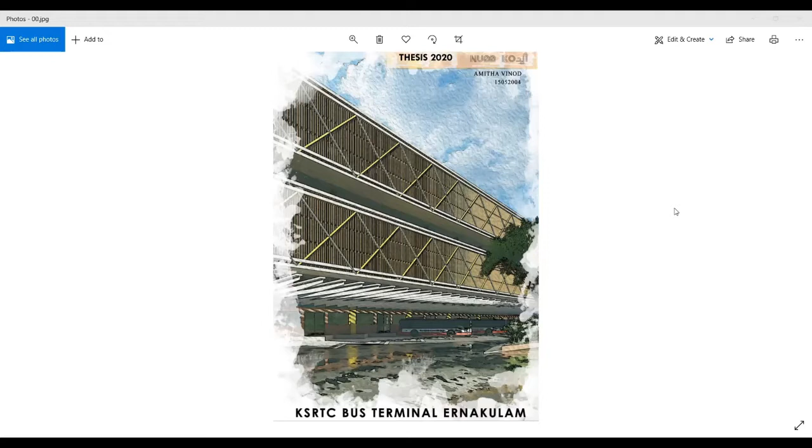Hi, sir. My name is Amita Vinod, and my thesis project is KSRTC Bus Terminal Ernakulam, which is situated in Kochi, Ernakulam.

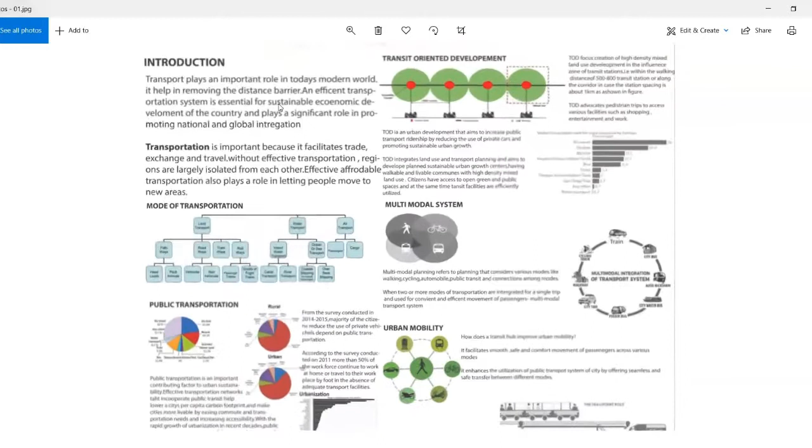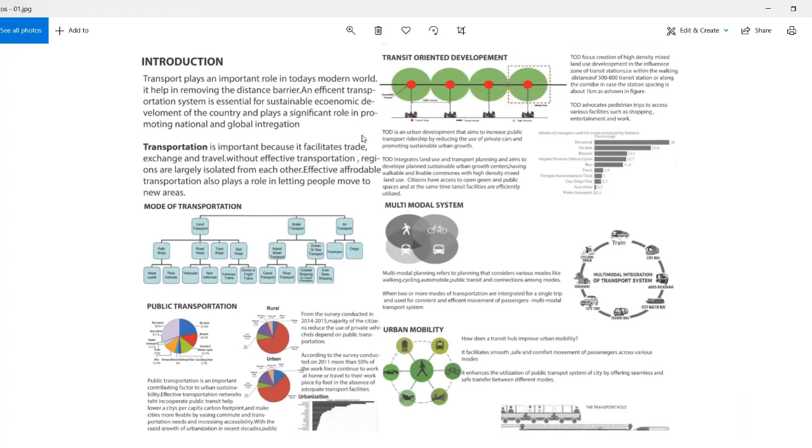Transport plays an important role in today's modern world. It helps in removing the distance barrier. An efficient transportation system is essential for the sustainable economic development of the country and plays a significant role in promoting national and global integration.

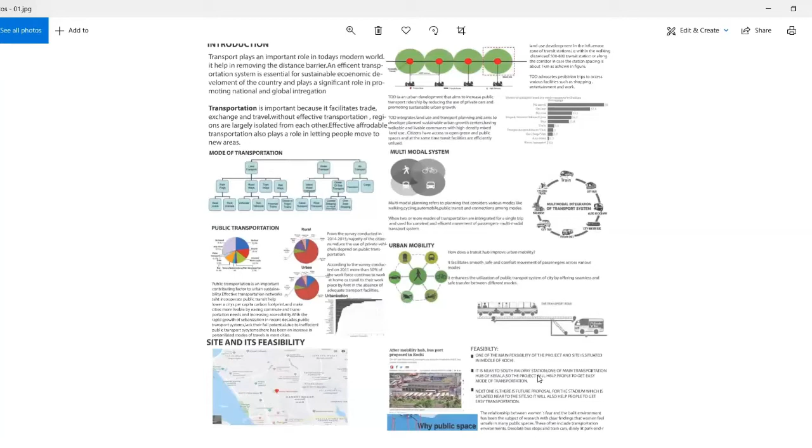When coming to the project feasibility topic, why I chose this topic is because we all know that KSRTC Ernakulam is one of the main transportation hubs in Kerala, and when compared to other populations, Kochi has a very huge growth in the population graph. Compared to the population, the area and service provided by the KSRTC is very less.

Feasibility of the project is one of the main aspects of this project, and the site is situated in the middle of Kochi, which is one of the main cities in Kerala. It is near to the South Railway Station, one of the main transportation hubs of Kerala. So the project will help people get easy mode of transportation. Next, there is a future proposal for a stadium situated near the site, so it will help people get easy transportation.

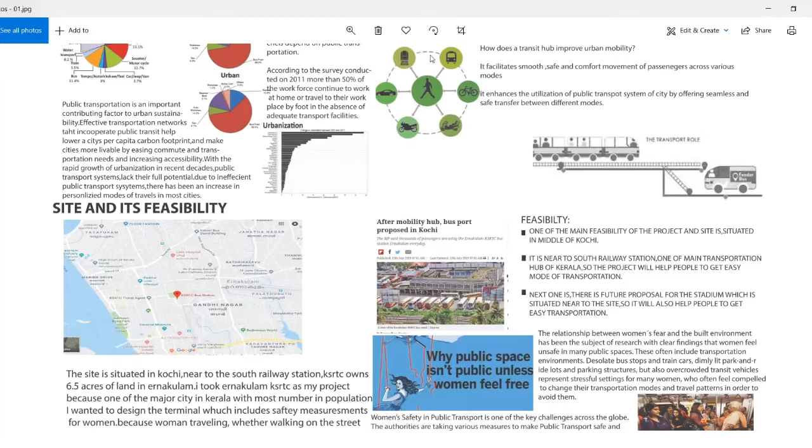And this project is handled by Kerala transportation.

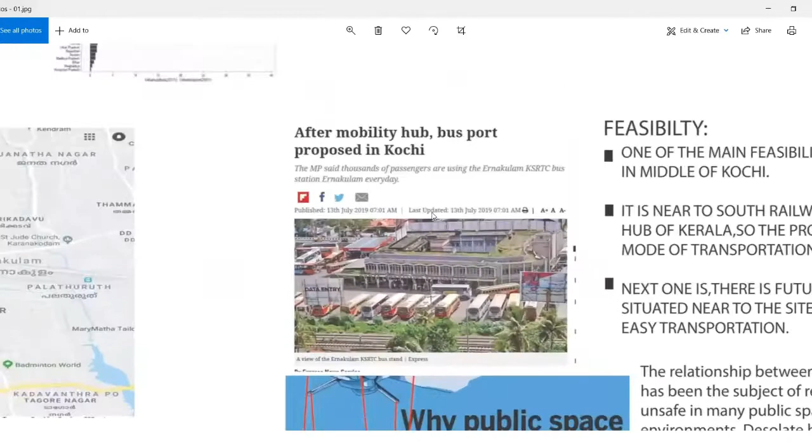This is a cut out. Okay.

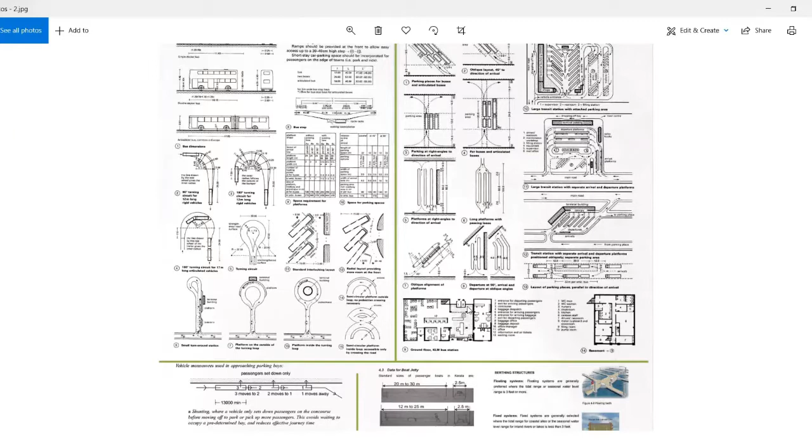When coming to the data collection, this sheet includes the width of the road, area measurements of the bus bays, other utility turning radius, service areas, and other utilities.

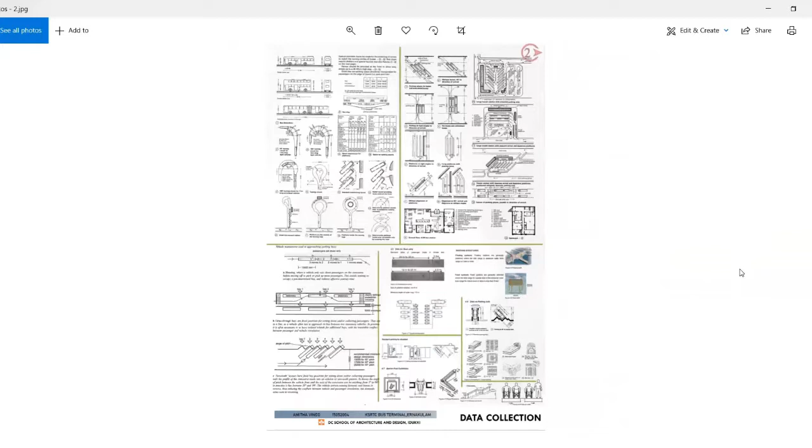When coming to the case study area, the literature case study, the first literature case study which I took for the project is Vyttila Mobility Hub, which is situated near our site in Kochi.

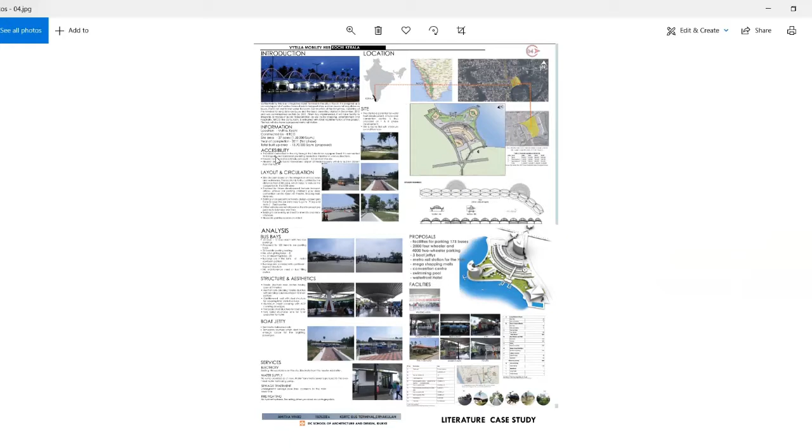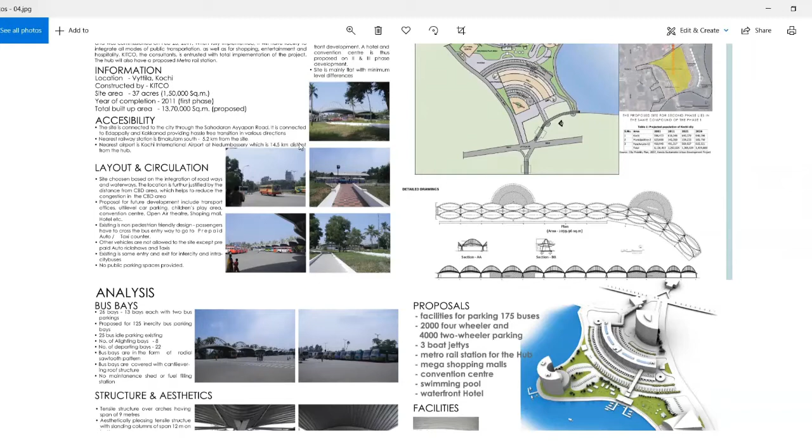The site is connected to the city through the Sahodaran Ayyappan Road. It is connected to Edappally and Kakkanad, providing hassle-free transition in various directions. This Vyttila Mobility Hub is one of the main modes of transportation in Kochi.

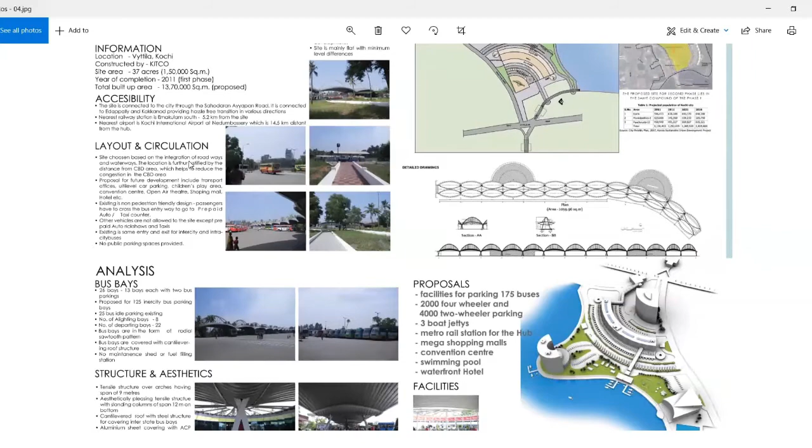Layout and circulation: the site is chosen based on the integration of roadways and waterways. The location is further justified by the distance from the CBD area, which helps reduce congestion in the CBD area.

The existing design is non-pedestrian friendly, which is one of the drawbacks of the design, and no public parking spaces are provided. Existing entry and exit are the same for intercity and intracity buses, so it's actually not divided properly, and only one entry and exit is provided.

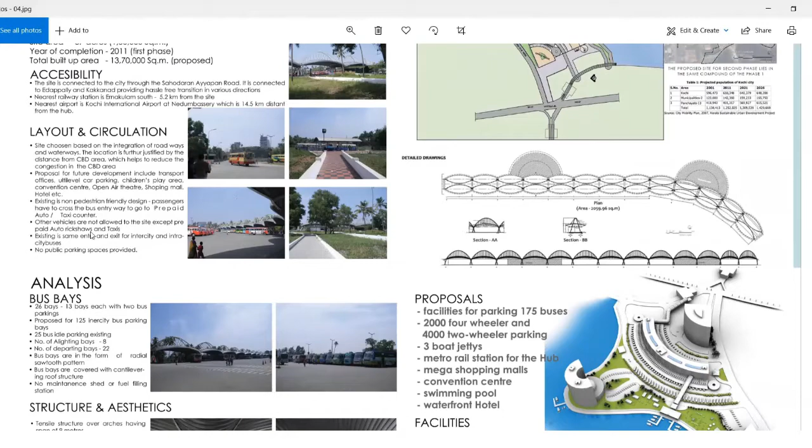Due to poor maintenance and lack of security in the KSRTC terminal, most people are using Vyttila Hub as the mode of transportation.

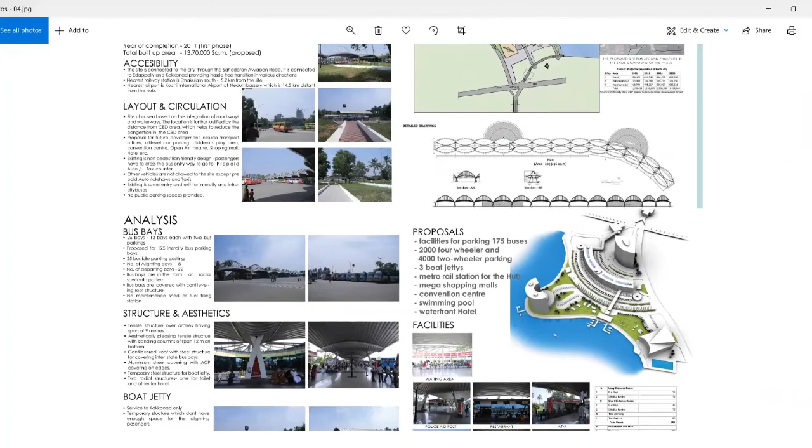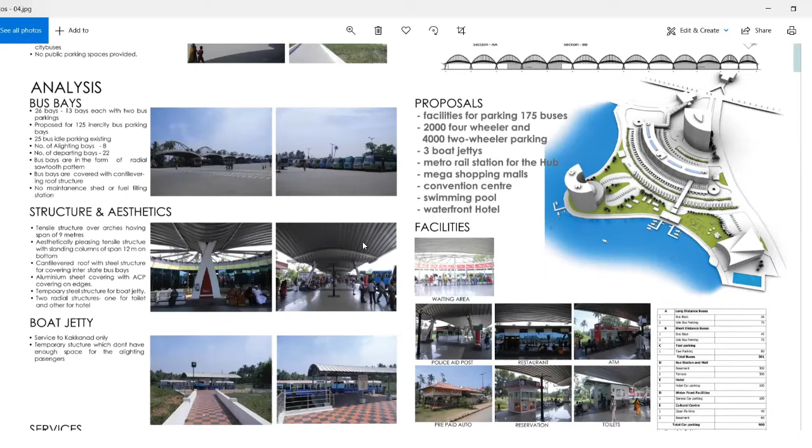When coming to the structural aesthetics, tensile structure is used in this building, having arches with a span of 9 meters. Aluminum sheets covered with ACP covering on edges. Temporary steel structures are used for the boat jetty.

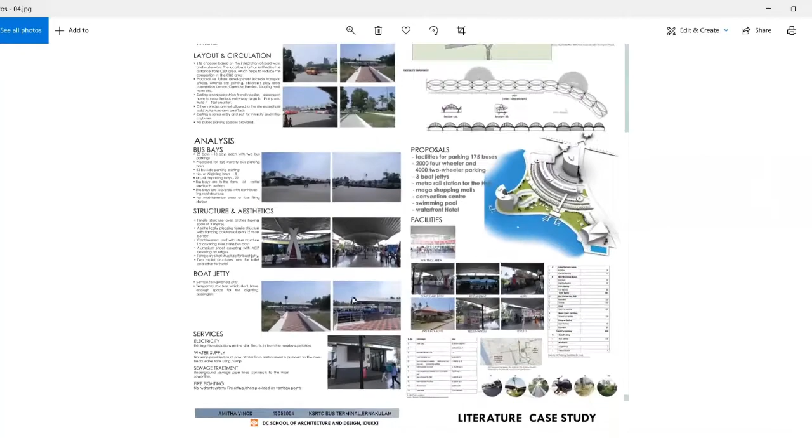A future development is coming, where the bus transportation system will also connect to the port jetty. Services include electricity, water supply, sewage treatment, and firefighting.

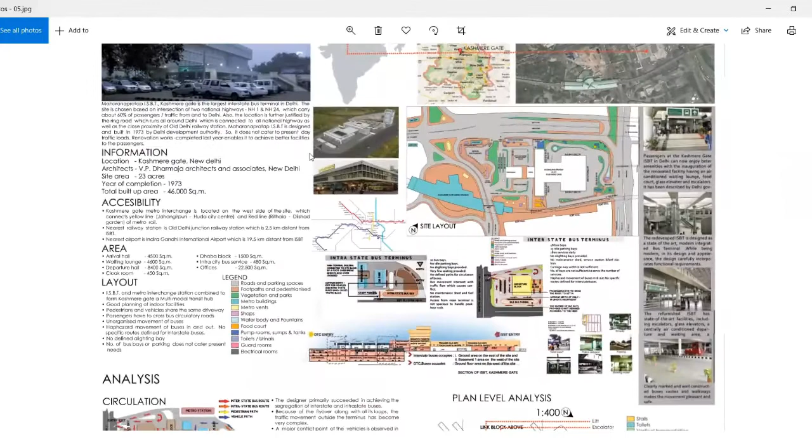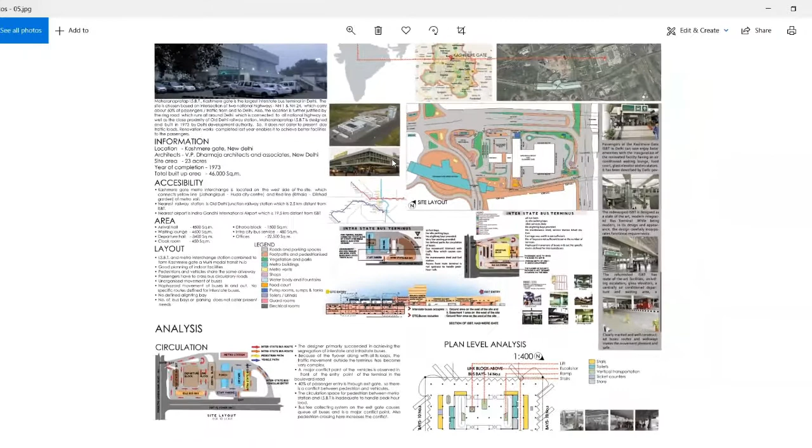My next literature case study is Kashmere Gate, New Delhi - Maharana Pratap ISBT, Kashmere Gate, Delhi. This bus station is one of the main transportation modes in Delhi. It is situated on 23 acres of land, and the total built-up area of this building is 46,000 square meters.

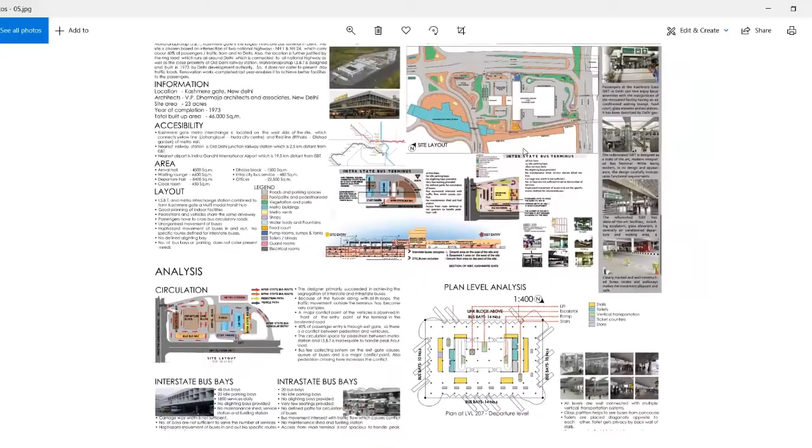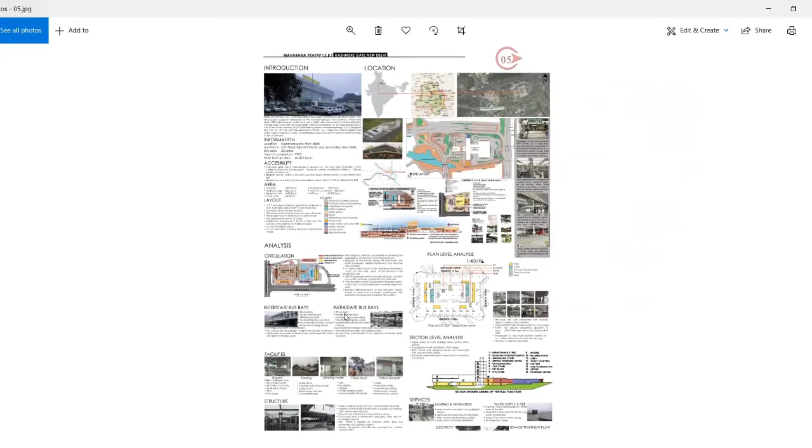Layout: I have already given the legend which shows the systems and mappings of the plan, and this plan also shows the circulation. In this case study, the bus terminal is divided into two sectors, interstate bus terminal and intrastate. I have already adopted that method in my design.

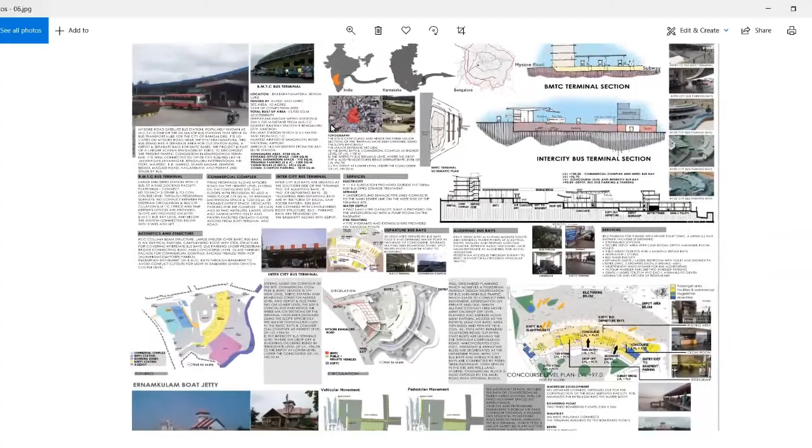After the literature case study, when coming to the live case study, the first project I took is Mysore Road Bus Terminal, situated in Bangalore, which is one of the main transportation hubs in Bangalore. It is situated on 10 acres of land.

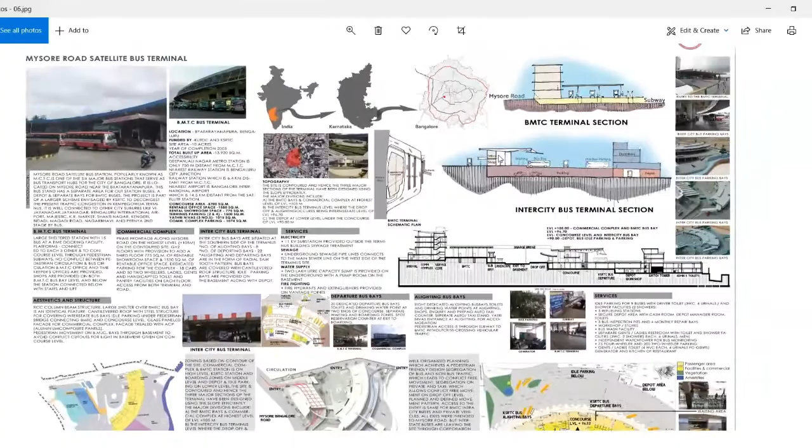It is one of the busiest transportation hubs after Kempegowda. This section shows the intercity bus terminal sections.

This bus terminal is also divided into two sectors, intrastate and interstate, and this shows the vehicular and pedestrian movement.

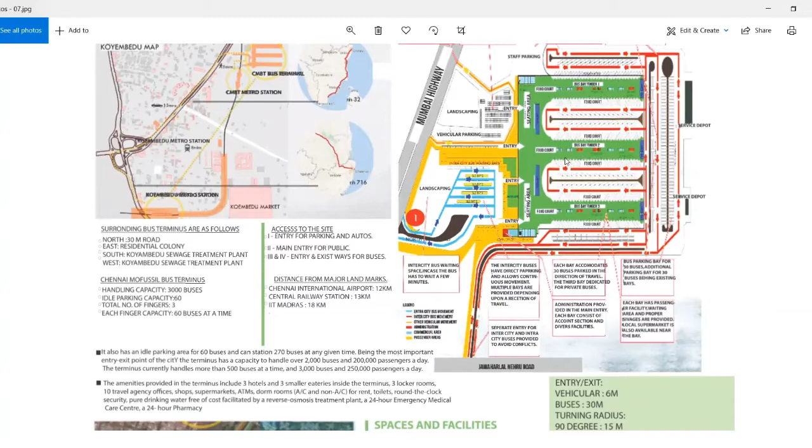The intercity bus terminal is divided into a finger type of alignment - you can see three fingers. The bays are arranged in a three-finger way, and the red area is the circulation area. We can see a food court and shops in the middle of the two bays.

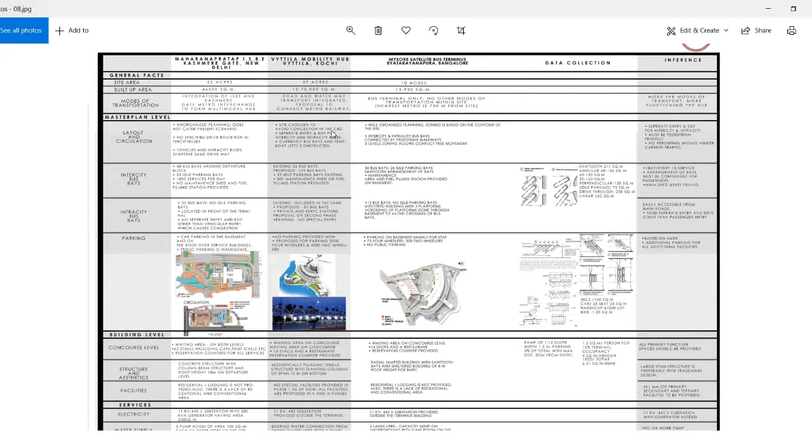So coming to the comparative analysis, we can see in the first three bus stands the area is different, like 25, 37, and 10 acres. And the layout of Delhi bus station is not organized.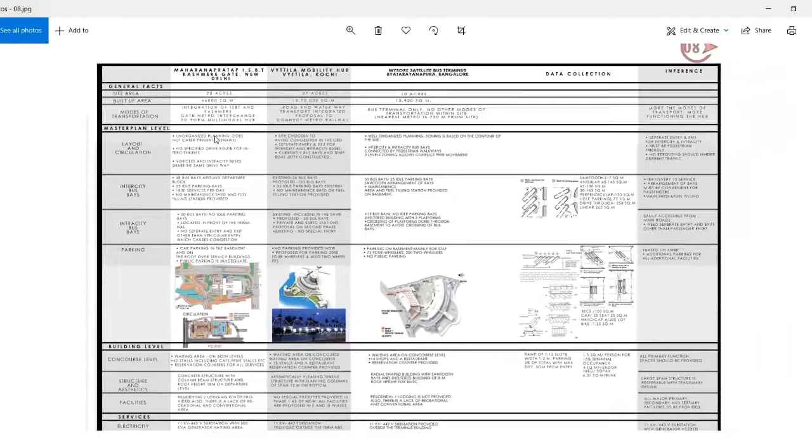But coming to the Vyttila Mobility Hub, the site is chosen to avoid congestion in CBD. The satellite shows well organized planning, zoning based on the contour of the site. In Delhi, there is no specific intercity or inter-district bus space, but in Vyttila and Mysore, it is divided into two ways.

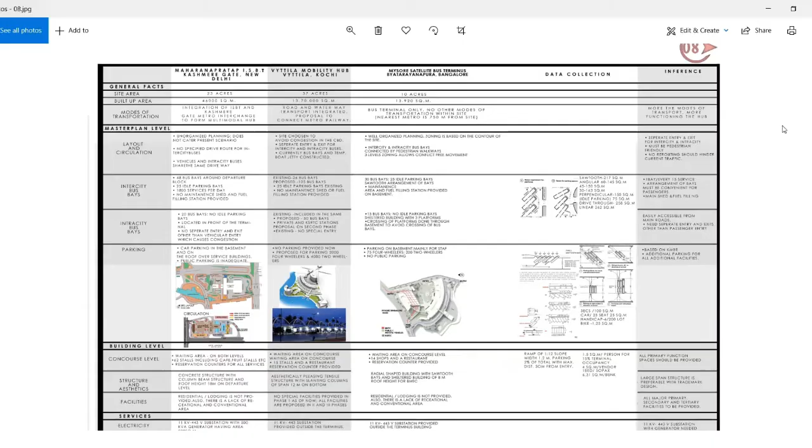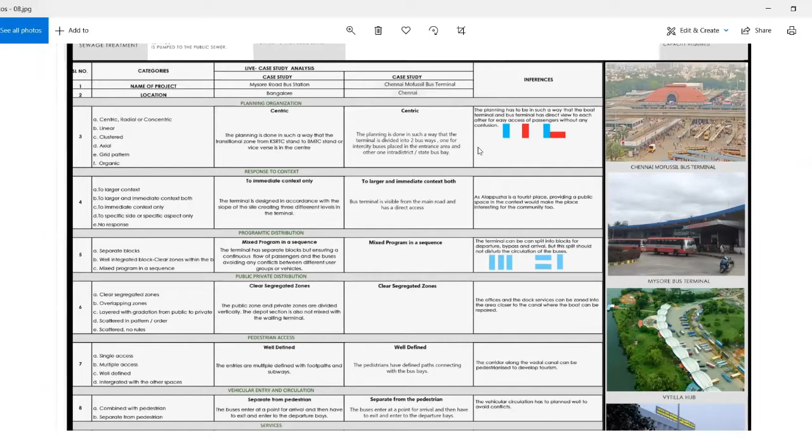So when coming to the live case study comparative analysis, the Mysore Road bus station is centric in both ways. The planning is done such that the transitional zone from KSRTC stand to BMTC stand or vice versa is in the center. In the same way, Chennai Mofussil is done.

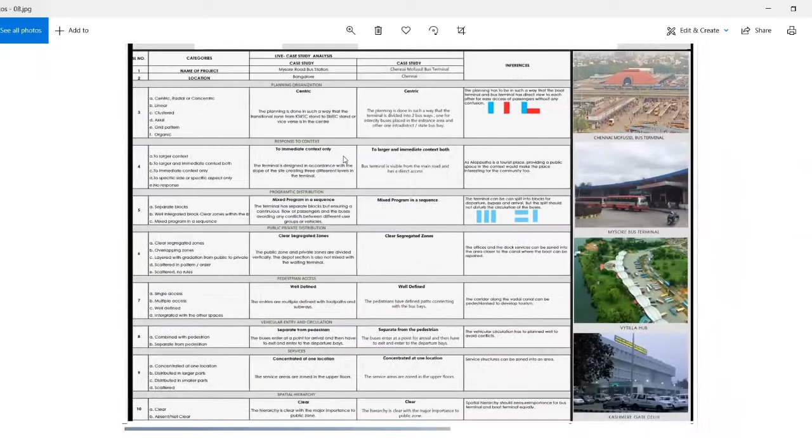My special topic is passenger movement in transport.

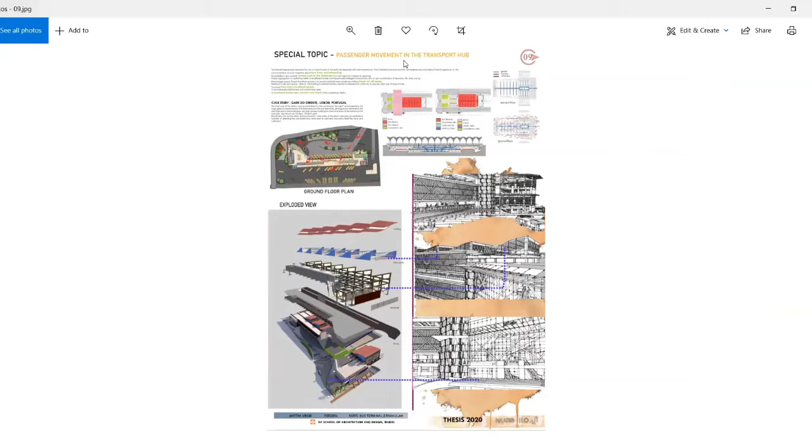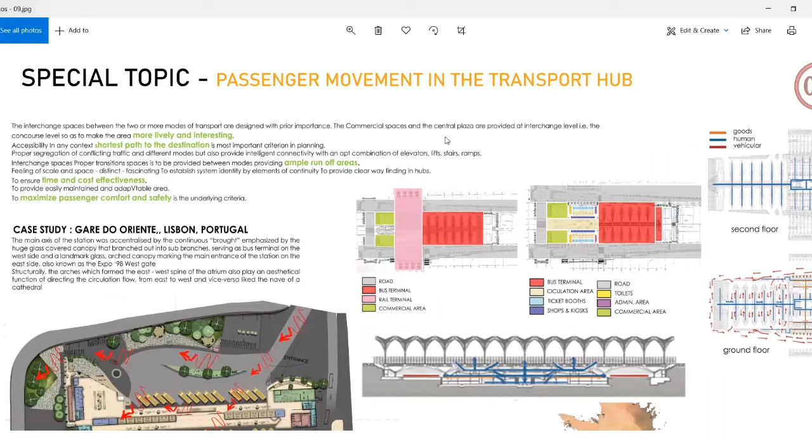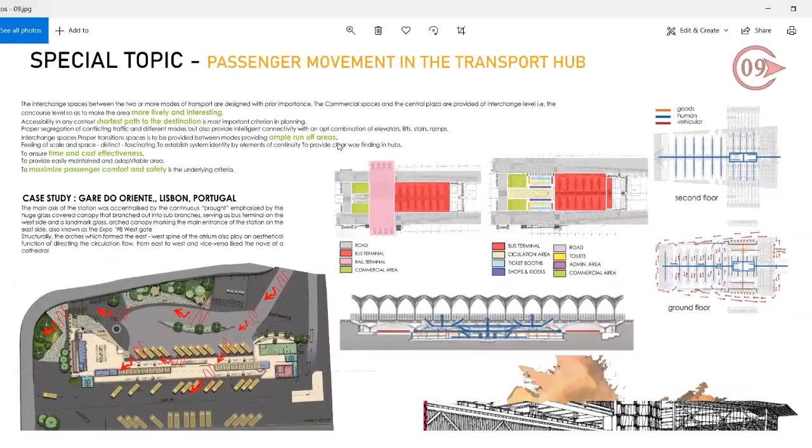Passenger movement is one of the main elements that has to be done properly in a transportation system. The interchange spaces between two or more modes of transportation are designed with prior importance. The commercial spaces and the center plaza are provided at interchange level - it's lively, interesting, with short paths to destination, ample runoff areas, time and cost effectiveness, and maximum passenger comfort.

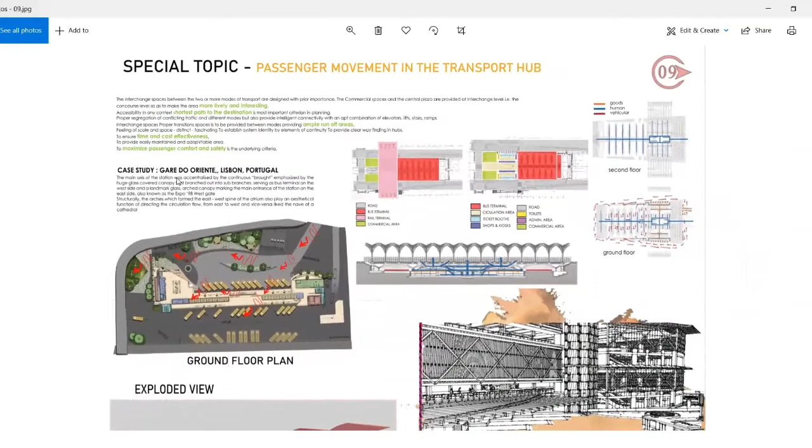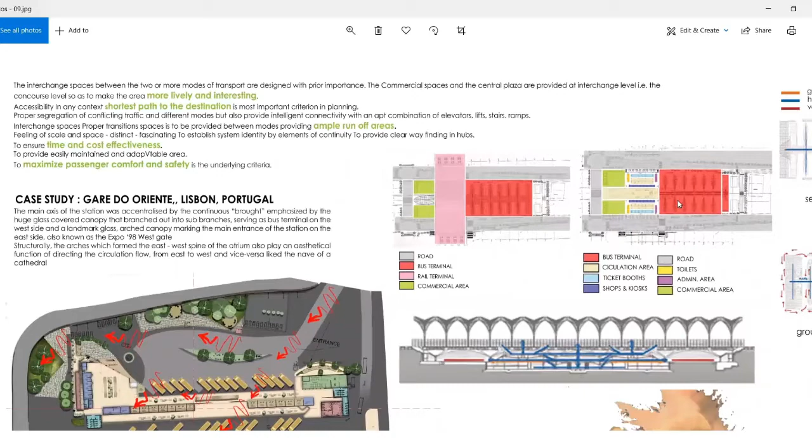I have also done a case study regarding this special topic, that is Gare do Oriente, Lisbon, Portugal. In this case study, the main axis of the station was centralized by continuity, which is my main concept, emphasized by the huge glass cover and canopy that branches out into sub-branches.

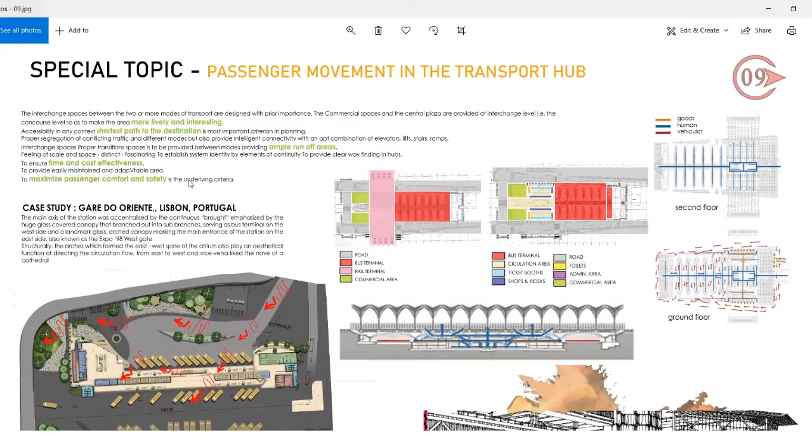This plan shows the movement of goods, humans, vehicles, etc. And this legend shows the areas in the plan.

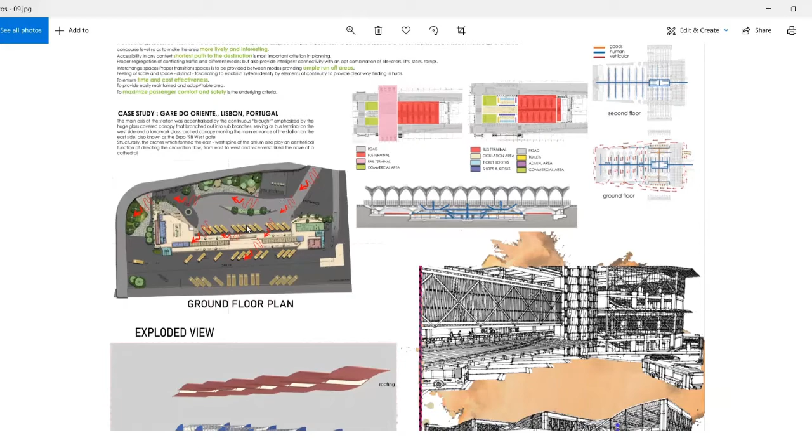So in my plan also, I have given a very easy way of movement for passengers and vehicles. I have given two separate entries for bus ways and exit ways, which will reduce congestion of movement in every way. So this is the exploded view of my building.

This is the roof. I have given deconstructivist materials as the building materials. This is the roof truss work structure, and the floors.

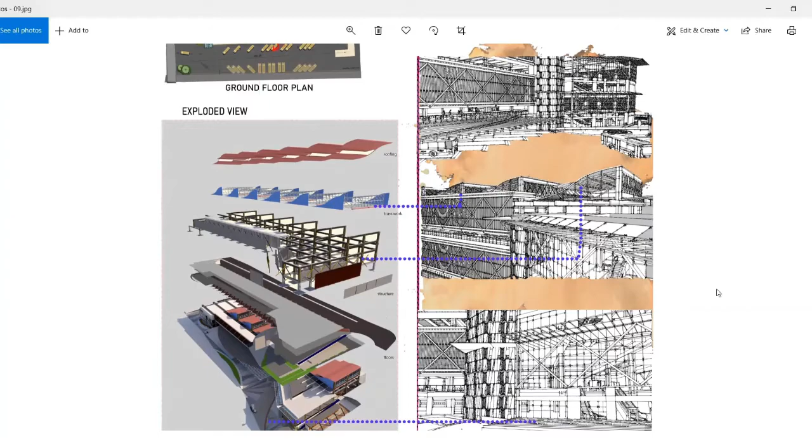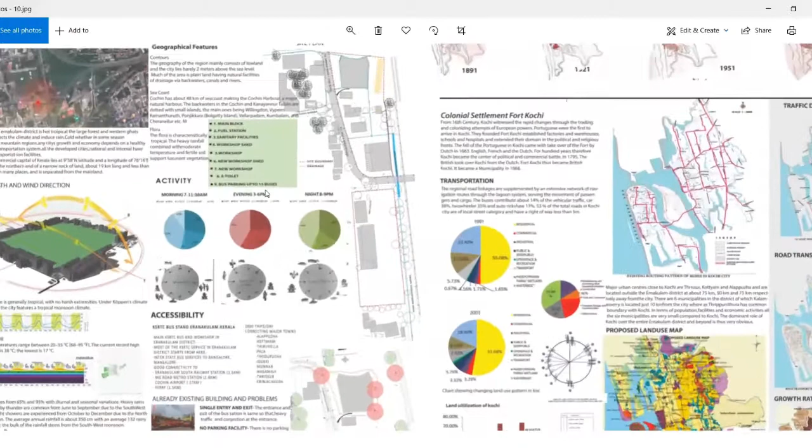So coming to my site, it is located in Ernakulam, Kochi, which is one of the main transportation hubs in Ernakulam. I have already talked about the site areas - it is 9 acres of land. This is the activity happening in the bus terminal during these times: 7 to 11:30, 3 to 6, and 8 to 9.

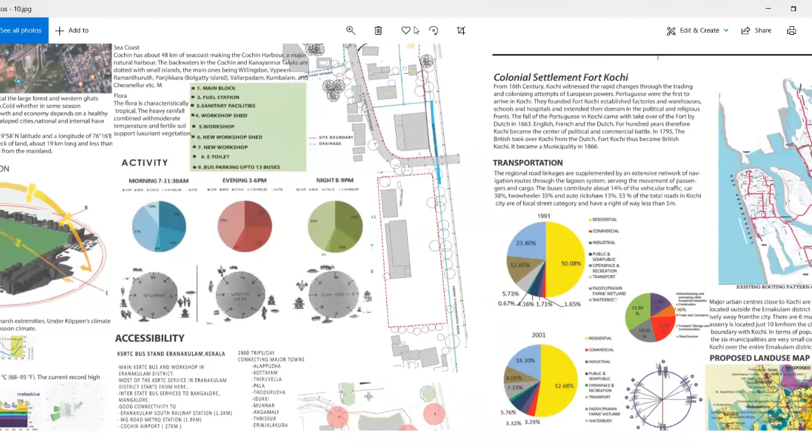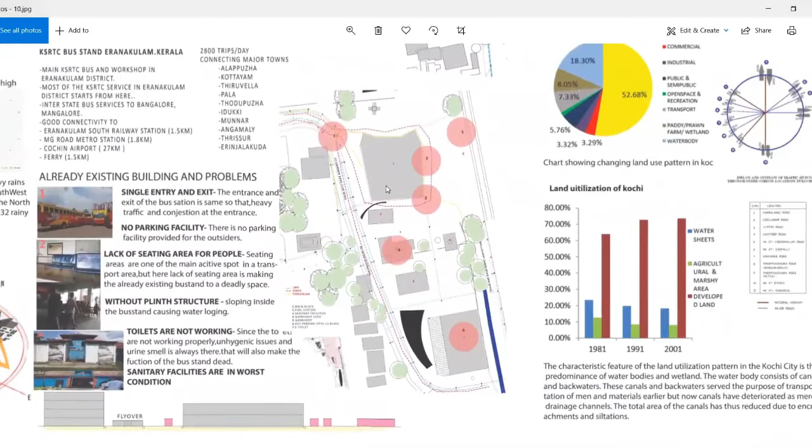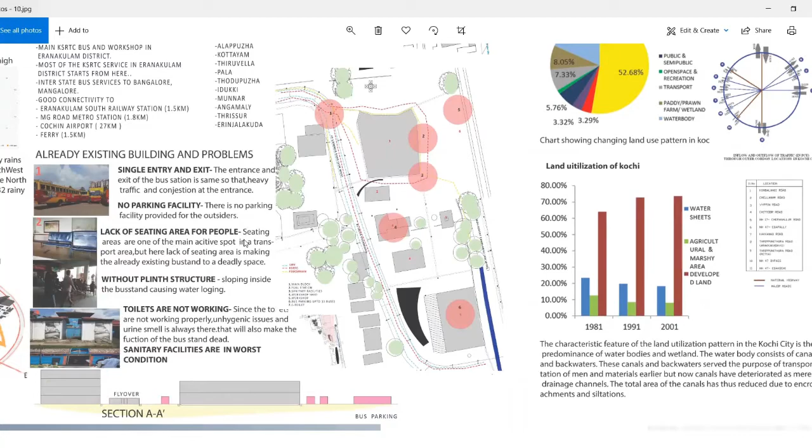So coming to my site, this is the already existing plan of my project. The KSRTC bus terminal is situated on the same site, and this red dot shows the problems in the already existing building. The problems are single entry and exit given in the existing design, which increases congestion and traffic at the entrance. There is no parking facility, lack of seating area for people, no plinth given in the structures which will cause waterlogging, and toilets are not working properly. This portion shows the colonial settlement, the development of Kochi plan, the transportation plans, etc.

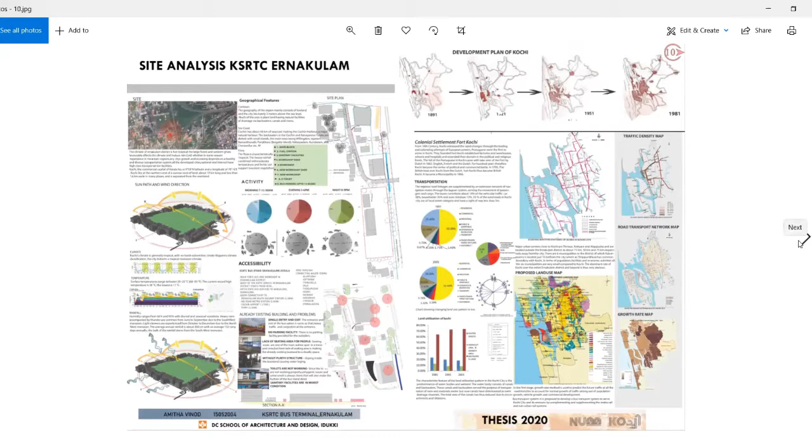Opportunities are that the site is situated in Kochi, one of the metro cities in Kerala, so people will come. We can reduce the rush by providing proper entries, circulations, and more buses.

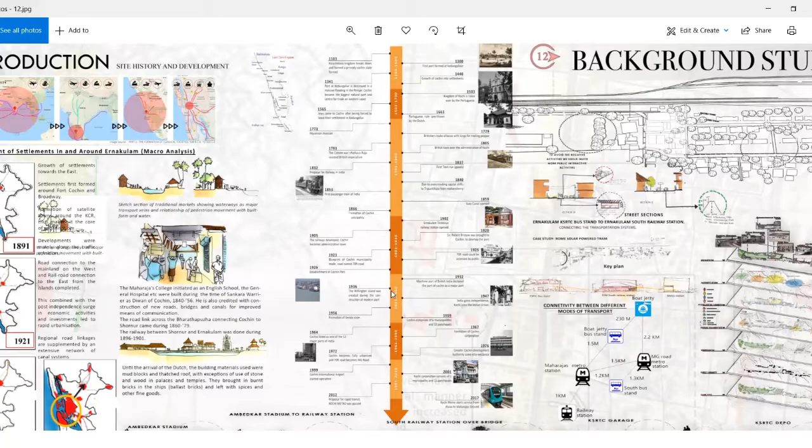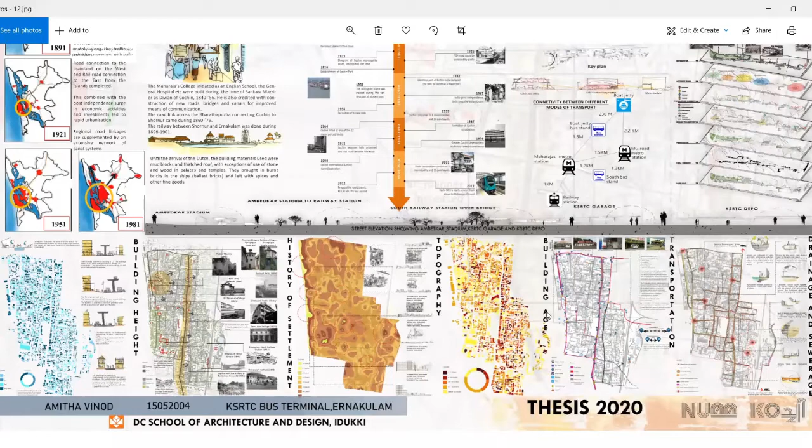Introduction - so this sheet is about the site history and development, the development of settlement around Ernakulam in macro analysis, since my site is situated in Kochi. This timeline shows the development of areas, which includes my bus terminal and transportation, and also the transportation development of Kochi. These are the maps showing building heights, history of settlement, topography, building age, transportation, and drainage sewage of my area.

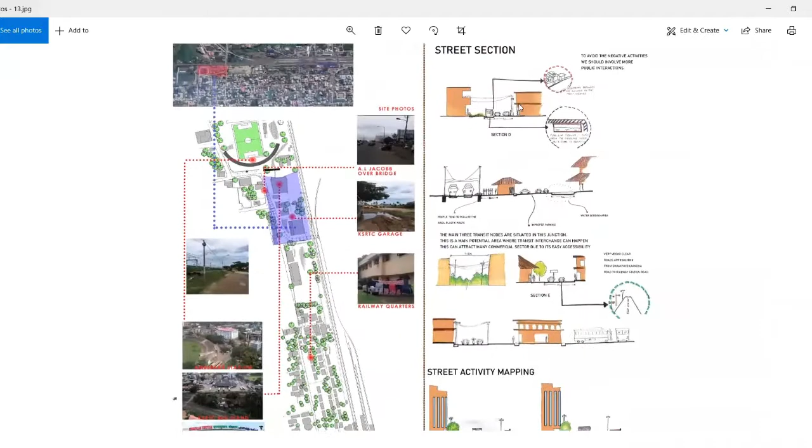So this sheet is about the activity map happening around my site, and this purple area is my site. This stretch is from Ambedkar Stadium, which is next to my site, to the railway station. And these are the street sections of the areas, and the elevations.

So when coming to the zoning level, my zoning is done such that I have provided different exit and entry for vehicular movement and for other movements. I have divided my design into two ways. I have adopted one element from the case study.

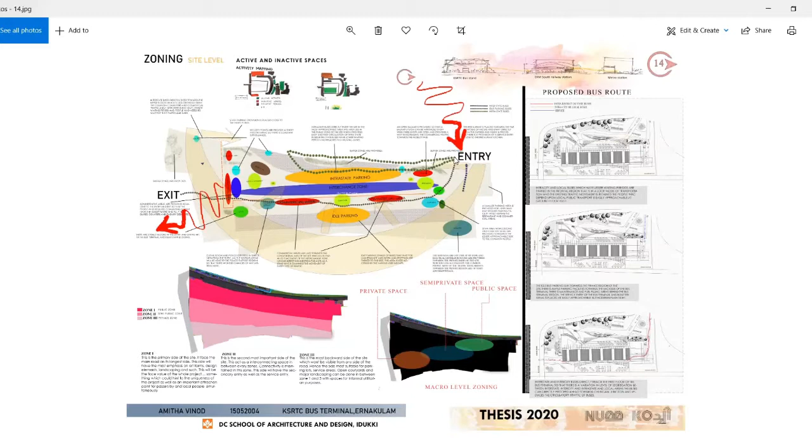That is city buses and inter-district buses. So I have given my intra-city bus area in the front portion and the inter-district area in the back portion of the building, because intra-city buses are always moving in a fast or continuous way - they don't have time to wait for a long time. So I have given my entry and exit in two ways that will reduce congestion in the site.

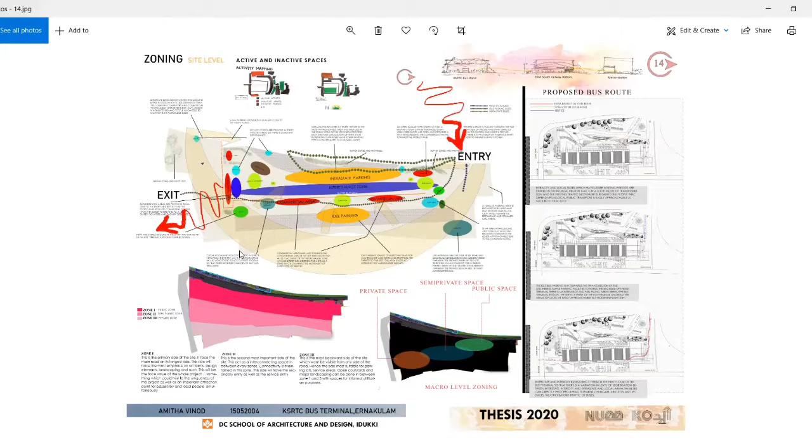And the intra-city and inter-district buses' entry and exit is also done in two ways, like you can see in the map. And this zoning includes the public, semi-public, and private sections of the site. The first one indicates the public zone, the second is the semi-public zone, and the third is the private zone.

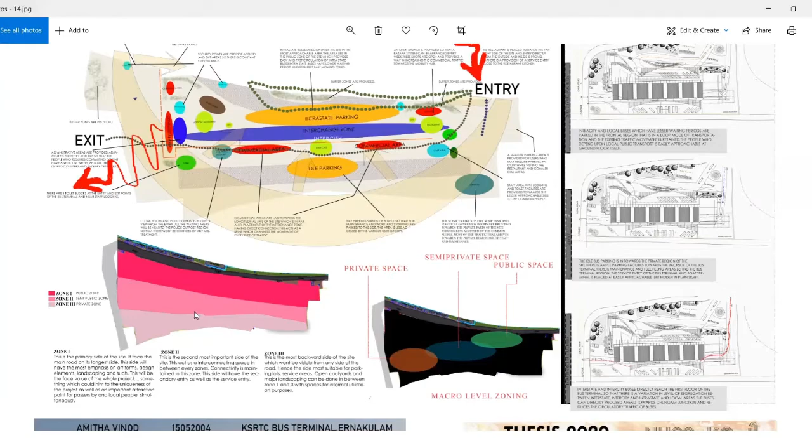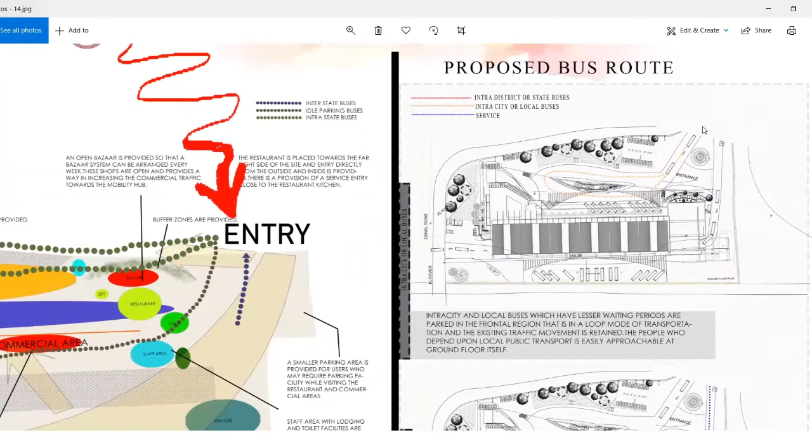This map is about the proposed bus routes. The yellow dot is for the intra-city bus terminal and local buses. This blue line indicates the service area, since there is a hotel nearby the entrance. The red dot indicates the intra-district bus terminal bus movement.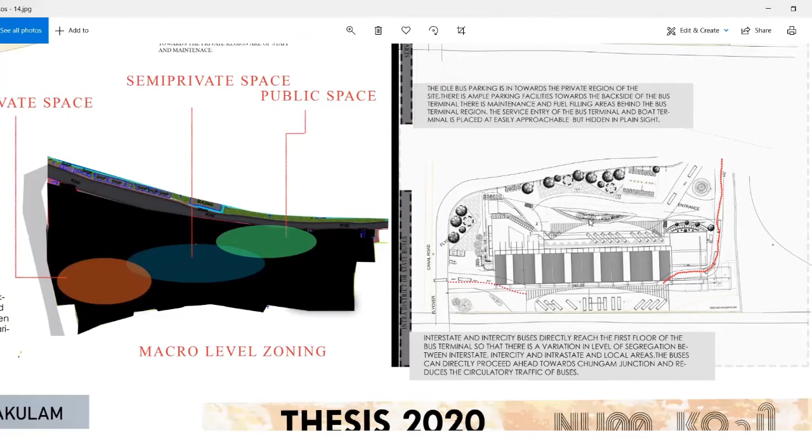My concept is metaphysical connection. The metaphysical connection idea that reality exists independently of one's mind and yet can be known is called realism. The metaphysical idea that no mind-independent reality exists or can be known, is idealism. This means creating visual connectivity in each continuous space. It also confirms security, like breaking the masses from continuous spaces, creating more openings, conflict-free and hassle-free movement.

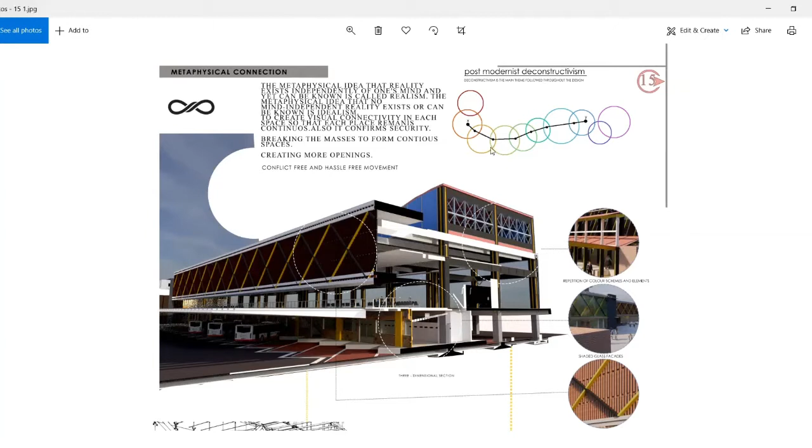I have given postmodernist deconstructivism in the building. My main concept behind the design is continuity. My design is going in a continuous way, so there will be no dark spots, and everyone can access everything at any point.

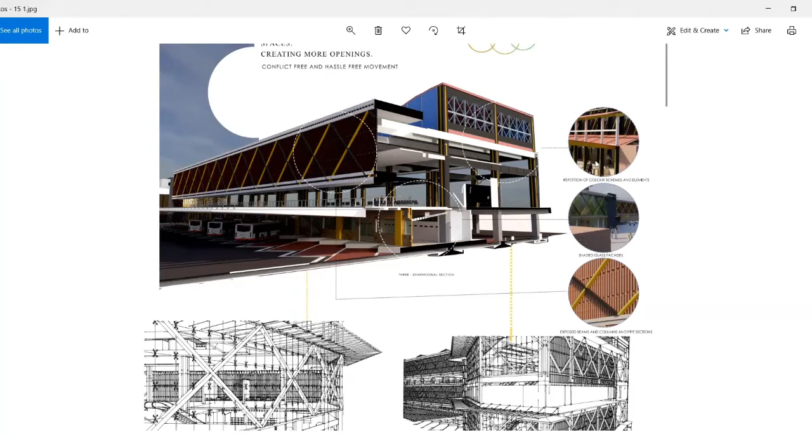In this picture, you can see I have adopted my concept in both ways, exteriorly and interiorly. In the exterior, you can see a continuous exposed beam and columns and pipe sections, like repetition of color schemes and elements which I have given here, and shape.

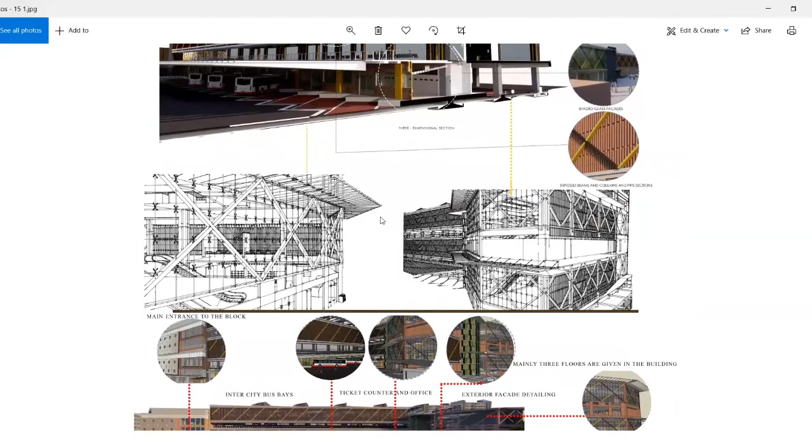In this sketch also you can see that, and this is about the exterior detailing of the building.

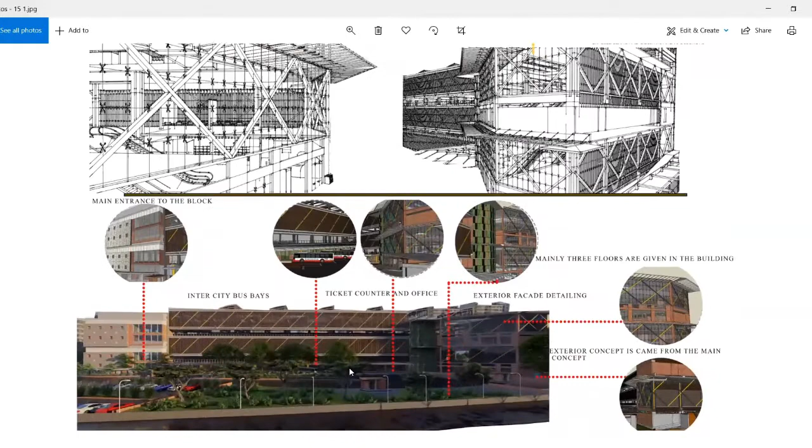My total site area is 9 acres, the build-up area is 15,200 square meter, and FAR is 0.4.

Coming to the master plan, I've already discussed the entry section, where I have given two different entries for both the intercity buses and intracity buses, because intercity buses are going in a fast way, in a sense that they don't have time to spend more time in a bus terminal.

So I have given the entry and exit at the shortest distance, and the intradistrict entry is given in two ways, with entry and exit both separate. This will reduce the congestion in the site and help increase the movement of vehicular and goods, humans, etc., and reduce congestion in the site.

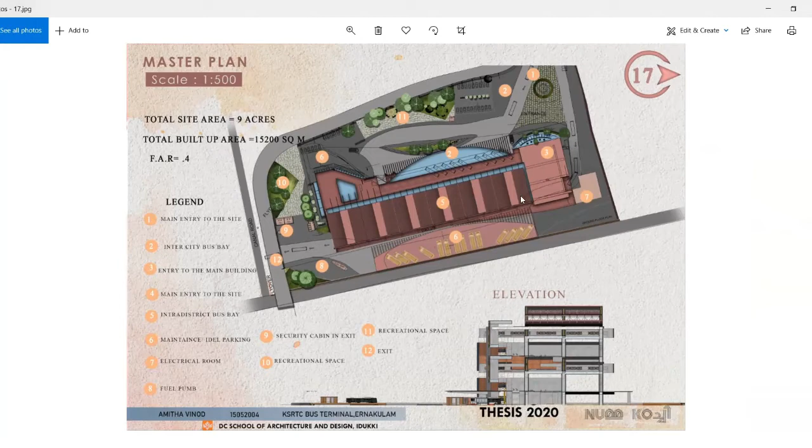You can see the plan is done in a straight continuous way, like here. Coming to the ground floor plan, the intercity bus space will contain 15 buses at a time, and the intra-city buses contain 20 to 25 buses at a time. I have given recreational spaces in the front portion and side portions.

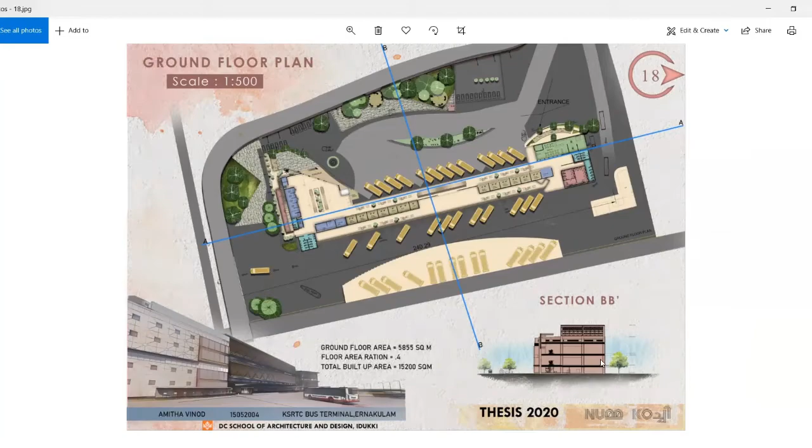The ground floor area is 5,855 square meter. Floor area ratio is 0.4. Total built-up area is 15,200 square meter. This is the view of the building.

My building is a three-floor building. The first floor contains rooms, recreational spaces, a hotel space, restaurant space, ATMs, shops, etc. We can divide the space into two sectors: semi-public and public spaces. The total floor area is 5,220 square meter.

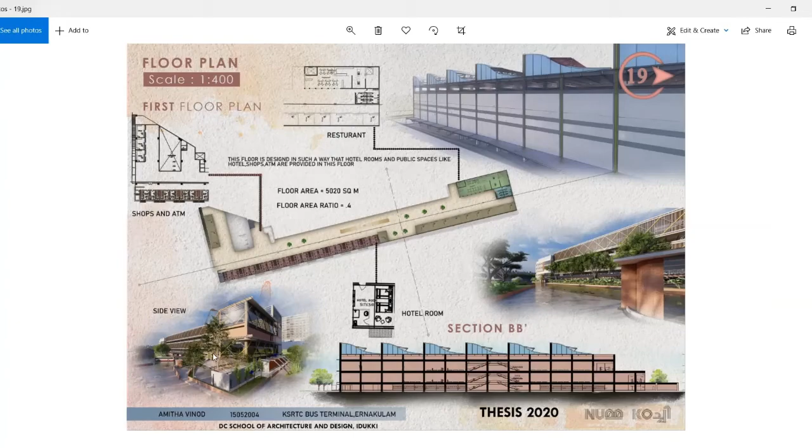This is the section. You can see the continuity here also, like the roof is also given in a continuous way. This is the side view of the building.

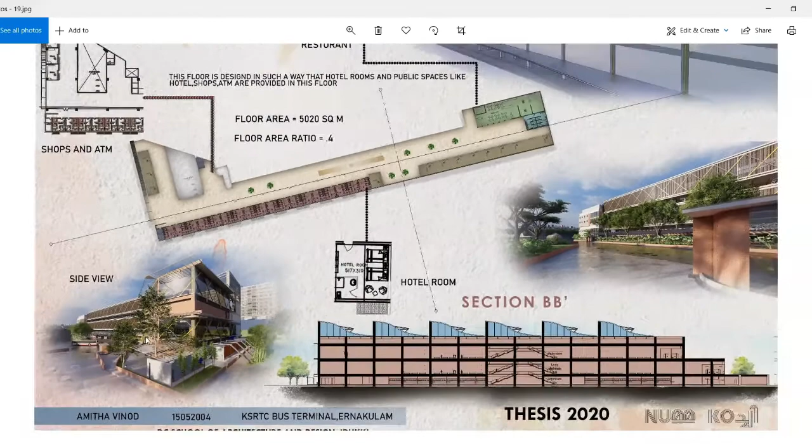This is the second floor plan, which is similar to the first floor with little changes. Floor area is 3,221 square meter. Here also I have included shops and rooms, etc. So I have given rooms in two floors.

I have already talked about the safety measures for people in public spaces. One of the main safety issues in public is woman safety nowadays. So if a woman is coming to my bus terminal at night time, and if she loses connection with her bus after a period of time, she can directly go to or use the room spaces.

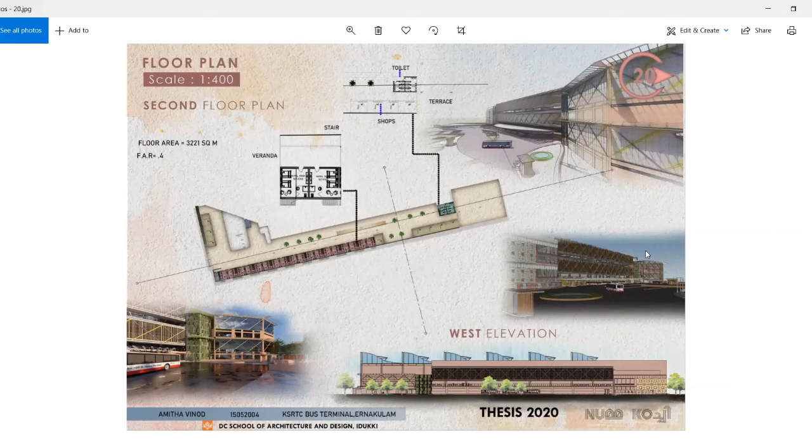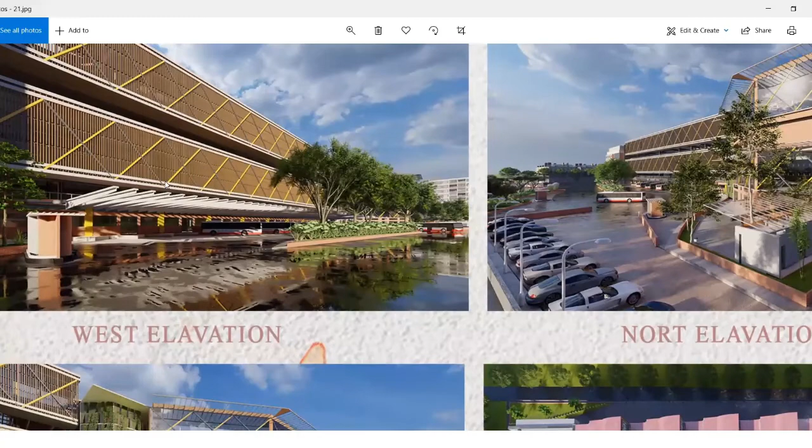And these are the views of my building. This is the west elevation. You can see the continuity of louver elements I have given. Here also you can see the facades, glasses, everything.

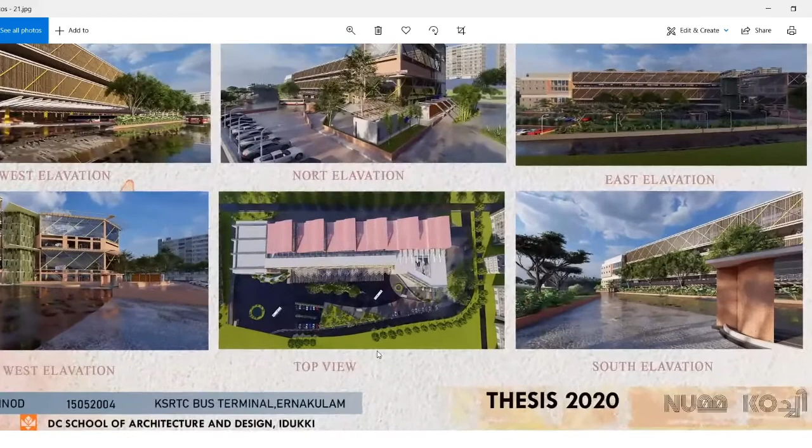This is the east elevation. This is the south elevation. This is the top view of my building. And this is the west elevation.

So I'm concluding my project. Throughout my design, I truly followed my concepts, giving interior and exterior elements which give continuity in spaces. In the interior, logos are given to indicate the continuity, and the passenger movement is also in a continuous way. Also, I have given a facade for aesthetic purpose. Thank you.